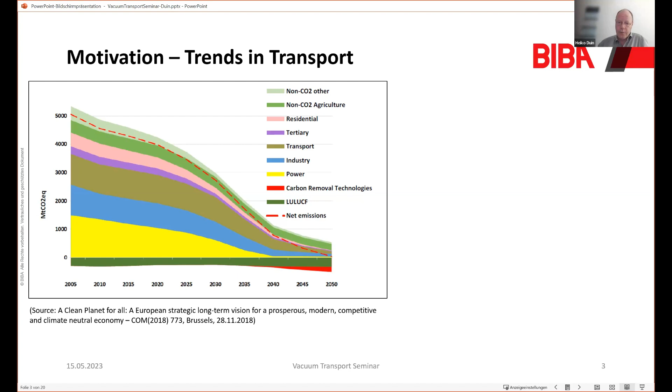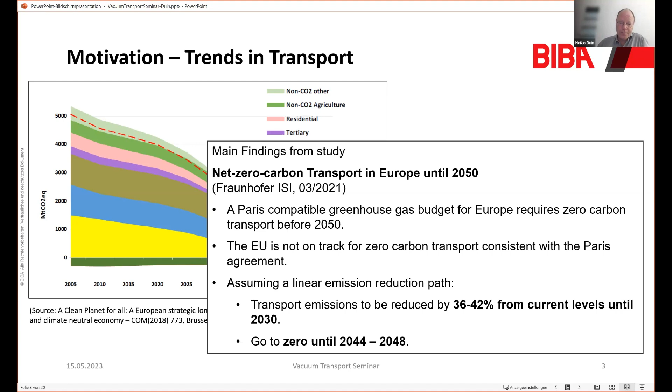But there was another study completed by Fraunhofer ISI called Net Zero Carbon Transport in Europe until 2050, and they concluded this is not enough. A Paris-compatible greenhouse gas budget for Europe requires zero carbon transport before 2050, and the EU is not on track for that. Assuming a linear emission reduction path, transport emissions have to be reduced by 36 to 42% from current levels until 2030, and from that point should go down to zero until 2044 to 2048, then we would be on track with the objectives set in the Paris Agreement. So the conclusion is that we have no time to lose, and the reduction of greenhouse gas output needs to begin immediately.

Within the project Epicenter, we are looking for answers to that. Epicenter stands for Enhanced Physical Internet Compatible Earth-Friendly Freight Transport Answer, and it's funded by the European Commission. There are three big areas: one is about new transport routes, like the Arctic and wildlife-friendly routes, or the new Silk Road. Then there are two more technology-driven topics: the first is Hyperloop, zero carbon transport saving up to 80% of energy, and the other is autonomous electric vehicles, zero carbon transport with electrified trucks. I'm focusing in the context of this project on the Hyperloop case.

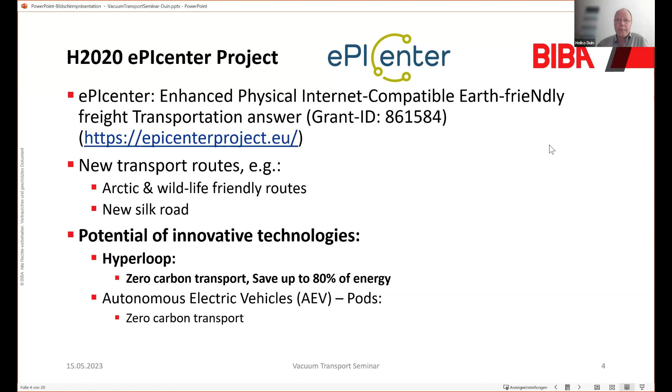So what is the nub of matter? What is the problem? The problem is that we are losing a lot of energy.

For instance, when trucks on interstates are running, they lose about 15 to 20% due to aerodynamics, and they lose about 58 to 59% through their engines, bringing the energy on the road.

When looking at high-speed trains, the problem is even worse. So when we have a train running at 400 kilometers per hour, the energy loss is about

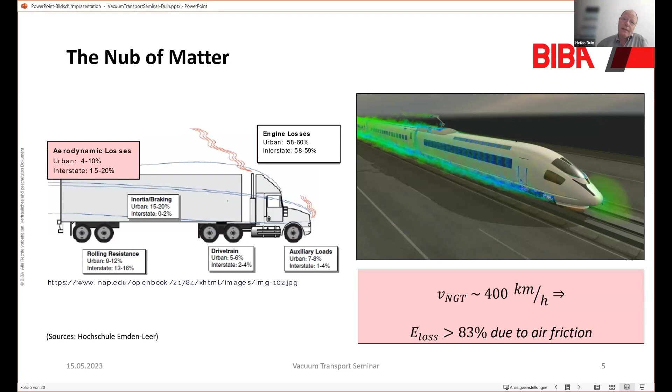83% due to air friction. So this brings up the idea of putting the trains, for instance, in an evacuated tube, which is then called Hyperloop technology. Within this evacuated tube, we are running pods.

They can be pressurized or not pressurized, depending on the cargo or what we want to transport with the pods. And we can also levitate the pods so that we have no roll friction, and we have a mechanically decoupled system. This leads to less wear, less vibrations, and we can run the system in an automated and controlled manner.

Within the mentioned Epicenter project, together with the University of Applied Sciences Emden-Leer, they're going to set up a demonstrator with a steel tube with a length of 24 meters and a diameter of 1.7 meters. They want to have it pressure tight down to 1% of atmospheric pressure, and it will be fully hooked up. This demonstrator we can then use to do some real technical experiments with this technology.

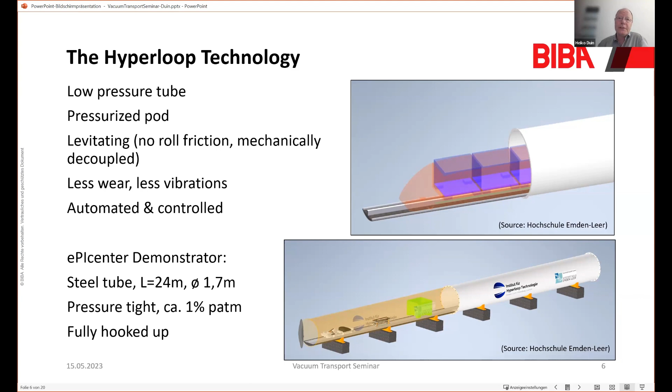Coming to my main topic, the planning methodology. We have an example in the Epicenter project where we want to connect a logistics service park, a logistics hub a little bit outside of a city, with an automotive production plant. I've researched the literature a bit about how planning works in infrastructure projects, and I came up with the German Federal Highway Act, which is a 5-phase planning design, starting with demand planning. Then we have preliminary planning, design planning, authorization planning, and finally the detailed design and construction.

In the demand planning, it's all about the demand we have. In our case, that means how much cargo needs to be transported from the logistics service park to the automotive production site. The preliminary planning is about where we can put the logistics service parks and how it can be connected with the production plant, so we have to think about possible routes.

In the design planning, we have to specify the routing more precisely, not only in 2 dimensions, but in 3 dimensions. So maybe there are things which need to be bridged or whatever. And we have to think about the capacity of the connection and whether it is economically viable.

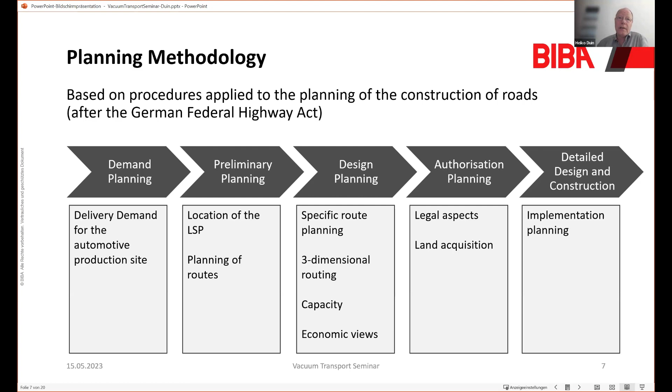On the next slide, I have this example we are looking at. We have this logistics service park, which is down here on the map, and we have an industrial plant, the automotive production plant, which is in the city of Wolfsburg. Now everybody knows about what plant I'm talking. And the distance is about 12 kilometers, or between 9 and 12 kilometers.

It depends on how we connect it with the CargoTube. The volume we have at the moment is between 10,000 and 12,000 cubic meters per day. And when we use this box, shown in the picture below, then we need around 12,000 boxes transported per day. The first assumption is that we can design a pod which can carry 6 to 10 boxes. So this is the example.

Now the areas of interest are: is it economically viable, and is the operation viable? What are the environmental impacts? What are the costs versus benefits? And what is the local acceptance of such a new transport technology?

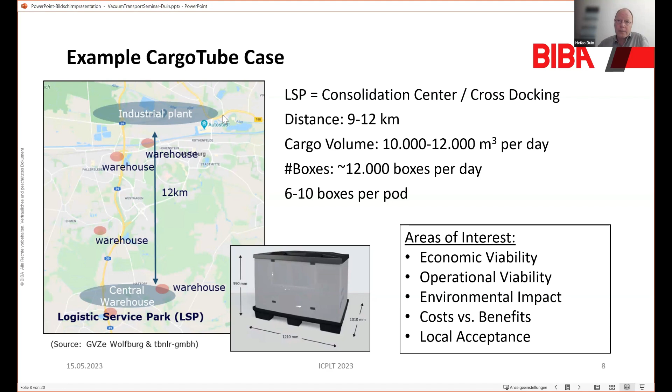Now I'm going from step to step in the 5 phases. The first one was demand planning. We saw already that we have to transport 11,000 cubic meters per day, and the distance is between 9 and 12 kilometers. But the cargo is not arriving evenly distributed.

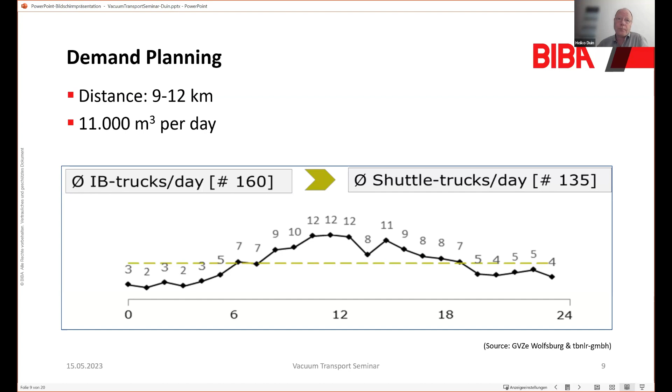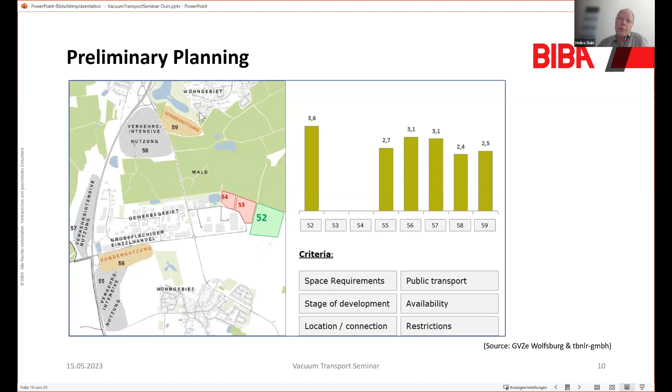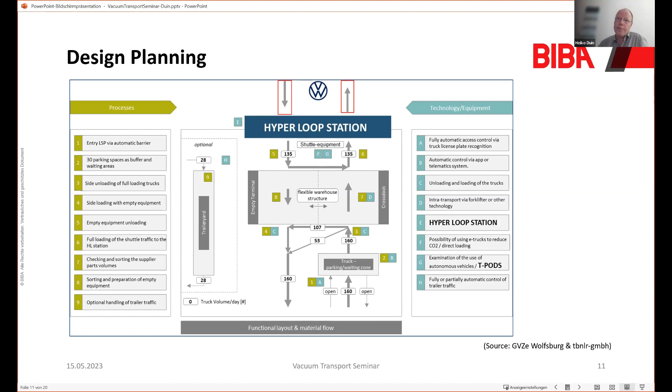We assume that the whole loading and unloading within this Hyperloop station is automated, so that we can use robots to do this stuff. Okay, this is the preliminary, the first stages of the planning.

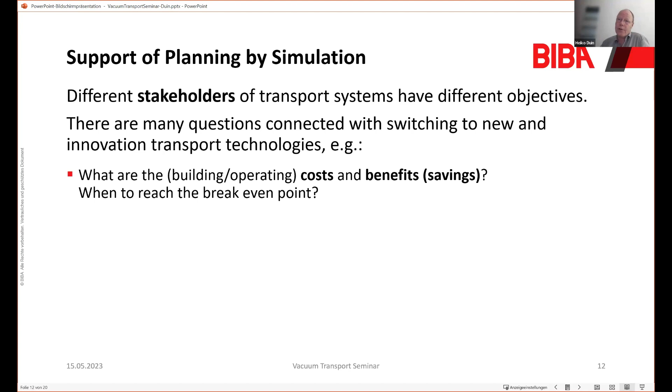But when we set up a new transport system, there are many stakeholders involved, and many questions connected with switching to new and innovative transport technologies. Examples are: what are the building costs, what are the operating costs, what are the benefits or savings we have, and when can we reach the break-even point when we make such a big investment?

What are the positive impacts concerning greenhouse gas emissions? Are there other positive impacts, for instance concerning particulate matter or noise? Is the logistics operation reliable in terms of timeliness and throughput? What are the socio-economic impacts, for instance employment or regional prosperity? And finally, what freight network configurations can be the best?

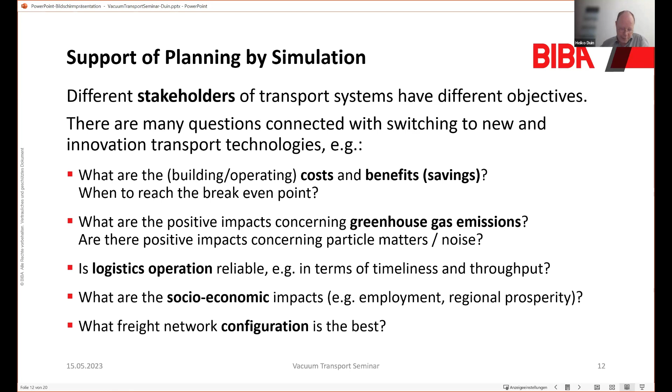So there is no one simulation tool which could answer all these questions at the same time. So, also within the Epicenter project, we made a framework to assess transportation technologies.

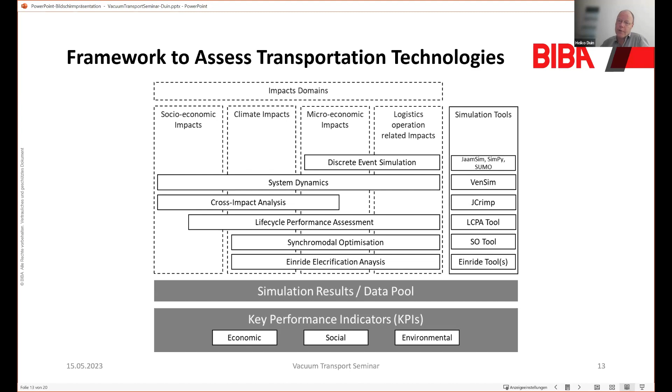From these simulation tools, we can generate data, simulation results, which we then can use to calculate key performance indicators, defined for the economic, social, or environmental domain. So this is our framework.

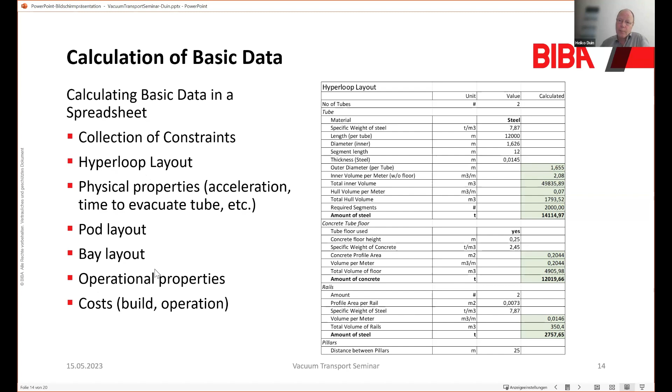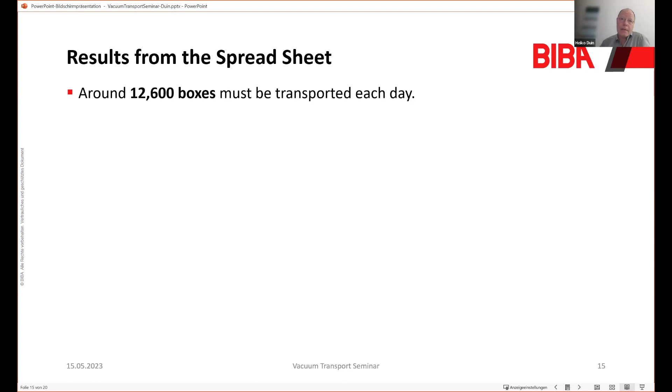So now when we have the basic data, first some results from the spreadsheet: around 12,600 boxes must be transported each day.

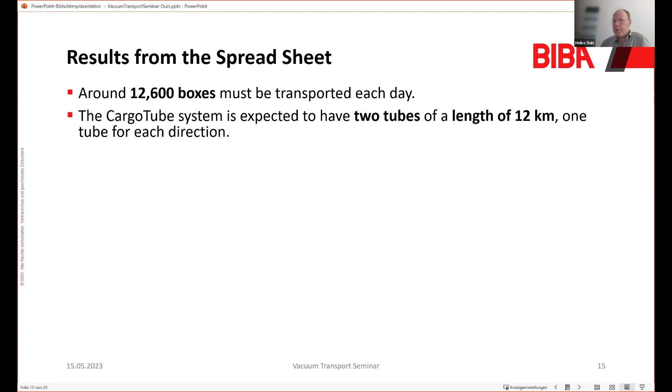We have a CargoTube system, which is expected to have 2 tubes of the length of 12 kilometers and 1 tube for each direction. Then the minimal inner diameter of the tube needs to be 1.65 meters. This is a constraint from the boxes we want to use.

And this results in 14,000 tons of steel for the tubes and 12,000 tons of concrete when the floor inside the tube is made of concrete, and further steel and concrete is needed for the pillars and for the rail systems.

Then the total volume within these two tubes is around 45,000 cubic meters. And when we have two pumps, the evacuation time down to 10 millibar is around 3 days, which seems to be quite long.

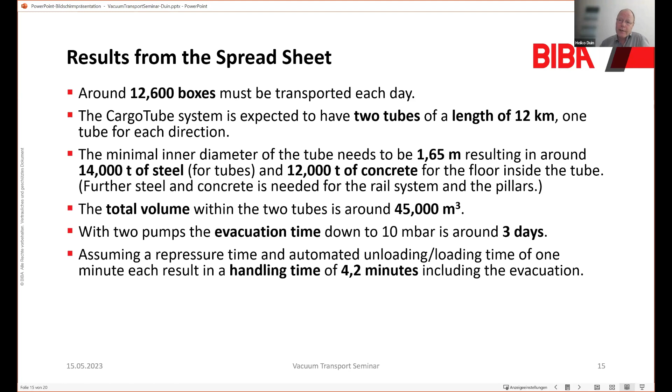Assuming a repressure time and automated unloading and loading time of 1 minute each results in a handling time of 4.2 minutes in a bay, including the evacuation. So when a pod is in a bay, the process is that it is repressured, then we have the unloading and the loading, and then we have the evacuation. And this takes 4.2 minutes.

The total travel time for a pod is 5.5 minutes, where we assume an acceleration of 0.1 g and a cruising speed of 150 kilometers per hour, and we also include the time for braking. In full operation, this system can handle 36 pods simultaneously.

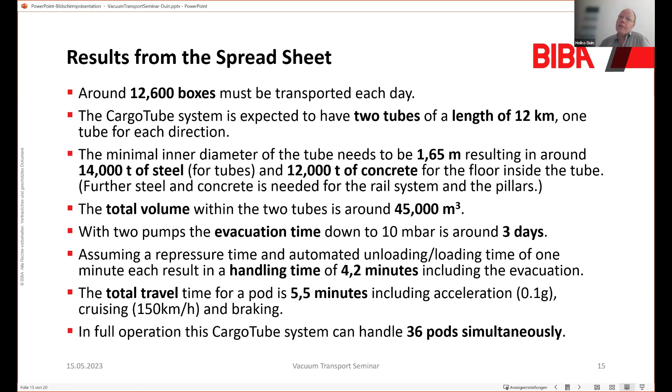On each side, we have 6 bays, and the process in each of these bays is what I said before: in the beginning, you have to wait with the pod until the bay is free. Then the repressuring takes place, the unloading and loading, and then the evacuation again. Then the pod has to wait until the tube is free, and we assume a safety distance of 1,000 meters, so when the last pod is already 1,000 meters in the tube, we can send the next one.

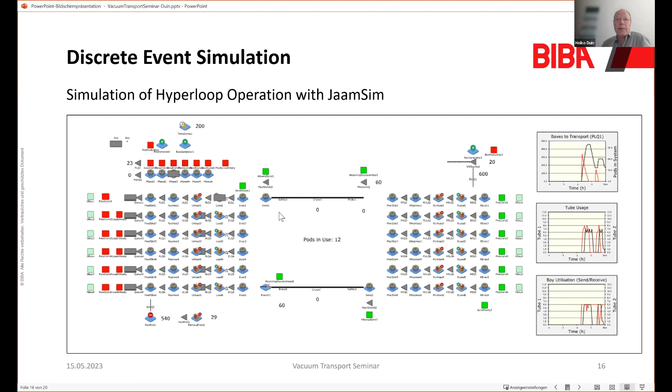We can run the system and do some experiments, for instance with specific demand curves during the day, or we can also experiment with the number of bays which are open. And I also have some results from the simulations.

The whole system is capable of transporting more than 16,000 boxes from the LSP to the production plants when all 6 bays are running, and there are no waiting times. That means the cargo is coming evenly distributed, and there are no gaps in providing cargo which is transported to the production site.

The maximum number of pods in the system when it's fully loaded is 33, and this is a difference compared to what we calculated with the spreadsheet. There we had the number of 36.

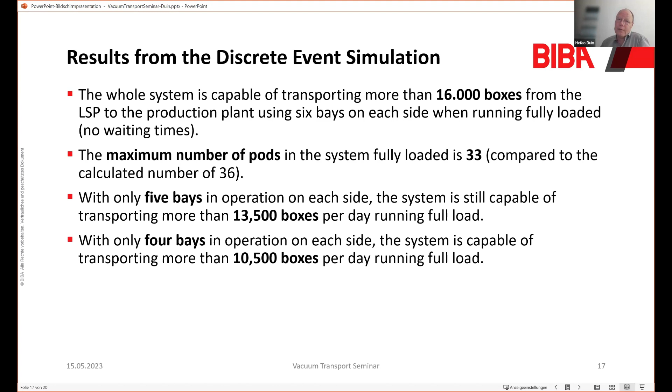Then with only 5 bays in operation on each side, the system is still capable of transporting more than 13,500 boxes. When we use 4 bays, then we can still transport 10,500 boxes. So 4 bays is the minimum, but then nothing should break, otherwise we have a problem. So it's better to have 5 or 6 bays and to switch them on and off when needed.

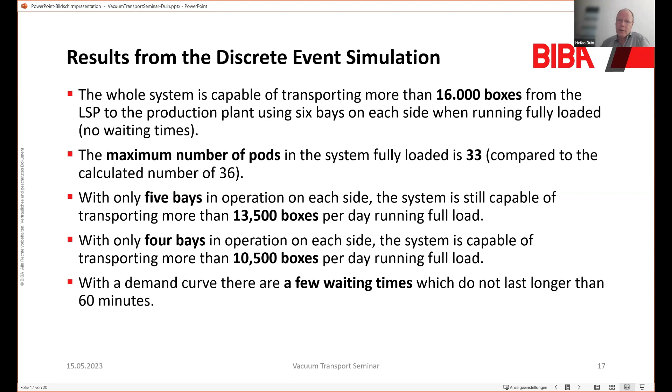So coming to discussion and conclusions, there are many advantages using a CargoTube system. The major advantage is the reduction of greenhouse gas emissions to zero. It depends, of course, on the electricity, how it is produced. Noise, weather exposure, and total energy consumption will be substantially reduced.

And we have reduced energy storage requirements due to electric propulsion and continuous recharging in the operation of the enclosed system. The CargoTube design is reliable and flexible, while automation reduces costs and personnel requirements. This is also important, at least for Germany, because we have a lack of truck drivers, and so this will help to overcome this situation. And we have a significant reduction in road traffic and congestions, especially in urban and densely populated areas.

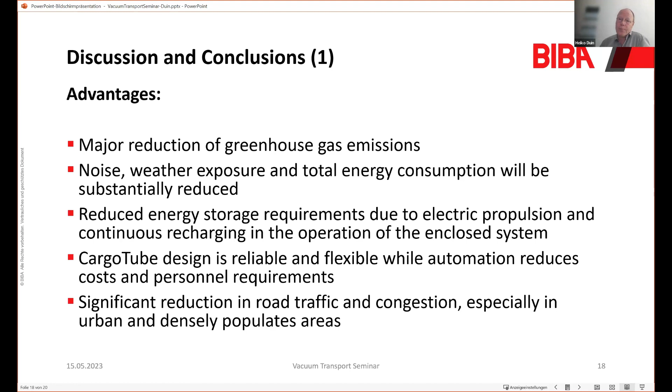But there are also some disadvantages. The first one I mentioned already is the time we need to evacuate the tubes. At the moment, there are 3 days, but we are thinking, or it needs to be proven, that the pod traffic can start earlier with reduced speed, for instance, while the tubes are not fully evacuated. That could reduce the time. We can also reduce the time by employing more pumps. So this is the point we are still in discussion.

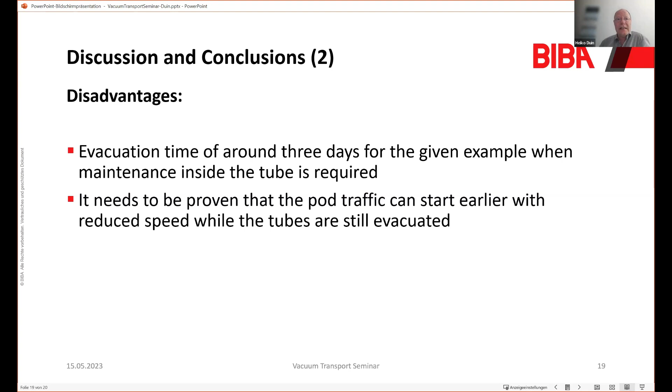And that's from my side. Thank you for your attention, and I'm open for questions.

Thank you very much, Heiko. Thank you for the great presentation. And I think Daniel is going to take the questions, right? Yes, so thank you, Lucas. Thank you, Heiko, for the nice talk. We would then take the chance to jump directly into the questions. There have been some of them, some quite interesting ones.

So the first one is more regarding the approach Heiko took to realize this model. What added value does this proposed cargo use case have compared to the ones we have been seeing currently from other Hyperloop players when designing such a cargo use case? I don't know the other ones, but for example, at a European level, we have seen some from Hardt, also from EuroTube at a certain point. Okay, so what is the characteristic, or what is different from these type of approaches compared to the one conducted from you?

I don't know, but I think what we are doing here—maybe Lucas, you can jump in—but what we are doing here is a very specific solution. We are transporting cargo from one point to the other, so we don't need such big tubes concerning the diameter of the tubes, and we can design it very specifically to the demand we have.

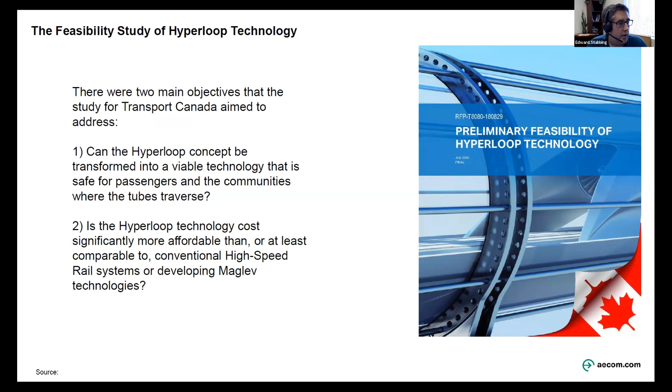I think the focus of my talk is going to be on a paper that was commissioned by Transport Canada for looking at the feasibility of the Hyperloop system. At the time, it was specifically looking at passengers, although it did recognize there was an opportunity for cargo as well. It sought to address two real questions: whether Hyperloop was ready to be deployed, and if it was, what the impacts would be. And secondly, to look at it directly in comparison to high-speed rail and maglev technologies, which were the two other options that certainly in North America - I'm based in Canada, just for reference - are being considered for high-speed ground-based transportation corridors presently.

So the study was structured in such a way that it had several key components. I'm not going to go into all of them because we'll be here for 5 hours, but it's a great report, so please feel free to read it. It is publicly available. I'm going to pick on the pieces that I think are probably more interesting to this group. So I'm skipping over the literature review, jumping straight into the technical features.

We did a technology readiness assessment, or a TRL approach, to looking at each of the components to the system. That was really important because it starts to highlight what's ready, what's maybe not, and then leads into the second piece, which I'm going to talk about - a risk and hazard assessment. The risk and hazard assessment is really key for Transport Canada as a regulatory body, because what they're sitting there doing is going, right, what are the risks? What do we need to legislate? What do we need to regulate? And what do we need to do to make sure that not only riders and users of the system are going to be safe and comfortable, but also the surrounding communities that this system is going to pass through.

So I'm going to talk through a number of different things that we did in terms of looking at risks and hazards. But firstly, I wanted to touch on some of the technology that we looked at.

We looked at a number of different areas: the infrastructure, so the tube and the structure, the propulsion and power delivery, whether onboard or infrastructure side, levitation and guidance, system topologies, and some configurations. We did a 500-kilometer test system and looked at some of the impacts that would happen as a result of going linear versus infrastructure side, and some of the other combinations we could look at.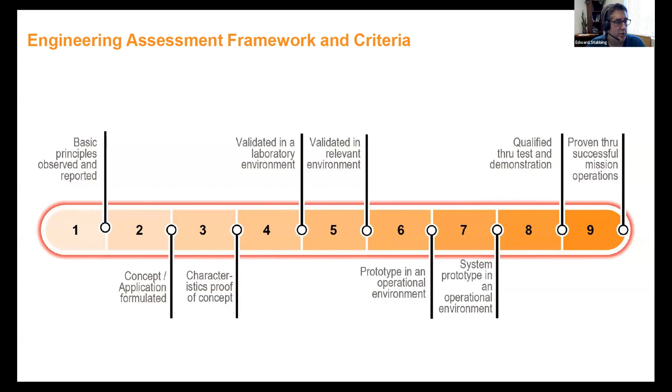We used the NASA TRL system, which for those of you who may have seen this before, gives nine levels of readiness—everything from 'that's a great idea and it's in somebody's head' to 'that's been implemented and it works and we trust it.' So we assessed these various technologies, looked at a number of different components, and came up with a lot of questions.

You'll see in the bottom right that some things aren't that far away from being ready, like the levitation and guidance system, the vacuum and the power. Then there's things like high-speed switching, which is still quite in its infancy and has a lot of uncertainty. As we were listening to Heiko's discussion, he talked about six bays—well, are those bays all going to be at low speeds like you'd currently see with high-speed rail and maglev, where you're talking 80, 90 kilometers an hour at most for those transfers? Or are these going to be in the hundreds of kilometers like the system is projected to travel at?

So it came up with these ratings, and from that we had a number of unknowns. I think that's fair for a technology at this level—to have these unknowns and leave a lot of questions that still need to be answered.

What is acceleration going to be? Some of our developers were saying we can accelerate at 3, 4, 5 Gs. Well, what's the impact of that on a human body? Is that even feasible? What will emergency procedures be? You just heard about what happens if pressure is lost in one of the sections of the tube—do you close off the section, or do you close the whole entire system?

How will boarding and alighting work? Some people say the pod's going to come out of the system, you board, and it's going to be reloaded and pressurized before being sent off. Others think it might be a loop, a bit like a train station—you come in, you board, and the loop continues on.

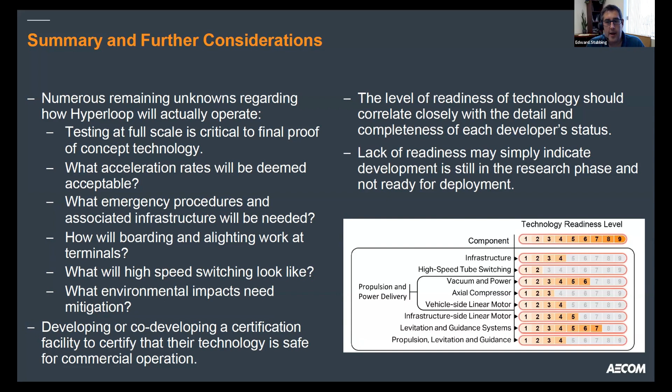So jumping into the next phase, we recognize where the technology is at, where we think it could go, what the application could be, talking about it as a passenger transportation mode. We start asking what are the hazards, what are the threats, what are the risks that come with this. We know some of the trip types, why it's been promoted as an important mode, why it's been given encouragement to be better than existing high-speed rail or potentially maglev.

What is the experience going to be like? Many of us have probably stepped inside a conceptual Hyperloop pod and seen this beautiful futuristic environment we get excited to ride in. But if we're going to be accelerating at 1, 2, 3 Gs, where's the safety in those seats? What are the rules about whether you can get up during travel to use the facilities? What if emergency braking suddenly has to happen at 1,000 kilometers an hour and you're not strapped into your seat? These questions start to arise when you think about the experience.

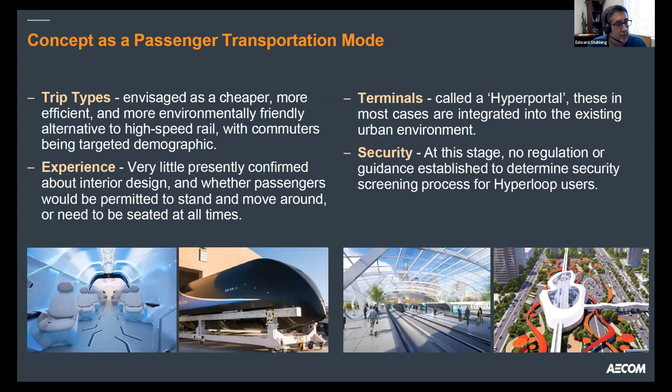One of the biggest unknowns is the terminals. Here's a picture of a potential terminal showing a single track where capsules load and unload. Is that realistic? What's security going to look like? We've all flown, so we know what security procedures are like on a flight. Is it going to be the same for Hyperloop, or like a modern railway station where there's very little security? You can walk right up to the vessel or carriage and board with minimal security, very last minute. That's certainly what a lot of the developers think. But if you talk to regulators, they're saying no, you're going to have screening, potentially identification verification. What does that mean for the amount of time and footprint of these terminals?

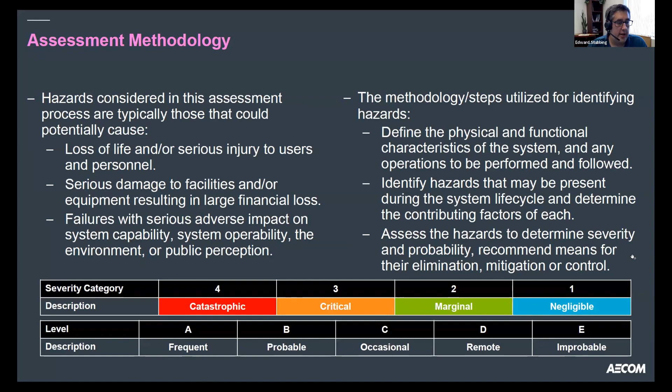Moving into our assessment approach, we utilized a two-part approach to assessing various hazards: the level of severity, i.e. what is the impact if it does happen, and the likelihood of it happening. That gave us a scoring process for all these different hazards and considerations. I will share this slide deck afterwards, since there's a lot of text to go through.

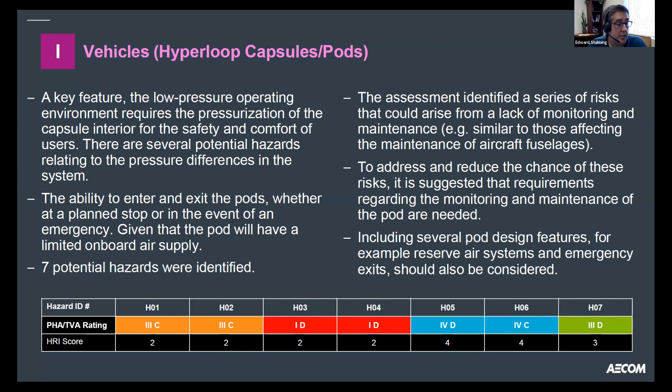So we looked at a number of different areas. We looked at the Hyperloop capsule, the pods. We identified factors like: what happens if there's a pressure imbalance? What happens if there's a technical failure of the life support system? What happens if the low-speed wheels do not deploy as the pod is approaching or departing from a terminal? We recognize there are risks here, also if the door of the pod doesn't open or close. What happens then? We categorized these risks and realized there are risks that, if they happen, are critical, and the probability of them happening is medium. That's the sort of thing that starts making regulators think this is something we might need to regulate, something we might need legislation to manage and protect.

Skipping through to power, we had questions like: what happens if there's a temporary power spike and the guidance or levitation is impacted? What happens if the magnetic gap between the primary and secondary motor fluctuates during operation? What's the impact of this? What happens if the entire propulsion system cuts out? That leads into: what happens if the power goes out? What are the evacuation procedures? What are the backup systems?

How are we legislating for backup systems into these pods? We start to realize, okay, we've got a pod that's been developed. It's going to take 16 people, have an onboard battery, and weigh this much, and this is therefore its capability of accelerating. Then you start bringing in regulations. Now you need a reserve power system, now you need a backup oxygen system. Suddenly the weight of your pod increases, the size of your pod increases, or you have less people sitting in the pod. What does that do to the economics of each pod? So you start realizing how regulation and legislation can have a huge impact on this system.

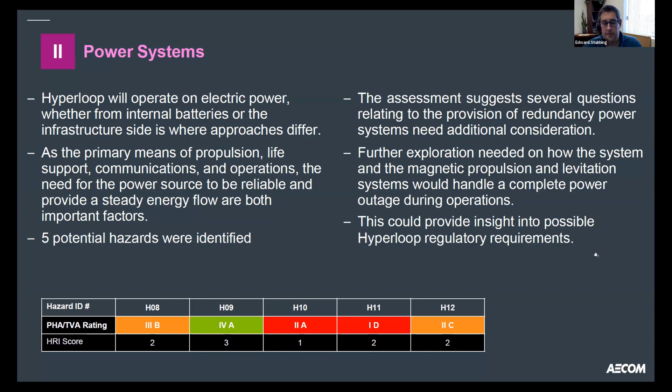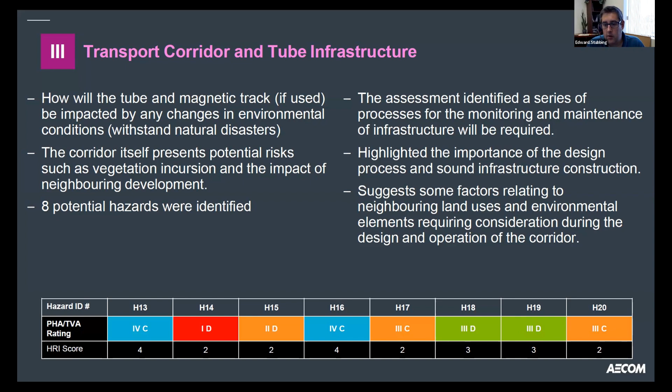Looking at the corridor and the tube infrastructure, what happens if you have an above ground system and the pillars fail? What happens if trees fall on the tube? What is the process for monitoring and maintenance? What happens if the high-speed switches fail? These sorts of questions start to appear, and you realize this is going to have operational impacts. I'm flying through these because there's a lot and it's a bit repetitive, and I really want to get to the questions because I think that's where the excitement is.

Communications - this is one of the areas where, from a technology readiness level point of view, it's quite well advanced. There are a couple of queries though about the capability of existing communication, even 5G communication, being able to match the times and requirements of a system traveling over 1,000 kilometers an hour. And so this is where you start to see some real risks - probability of them happening fairly low, but the risk if they do happen is quite high. What happens if you're talking about headways, and the communication system between each pod fails?

We heard Heiko talking about 1,000 meters. Some of these developers have said they think the headways could be a matter of seconds between these pods. What happens if pods traveling at 1,000 kilometers an hour, seconds apart, need to communicate constantly? What happens if that communication fails? So you start realizing, okay, now a regulator might start saying, well, actually headway has to be 4 times the braking distance of each pod, and you need to have some redundancy system. That means if one pod fails, every pod immediately brakes. There's a lot of complexity that goes into implementing those additional systems.

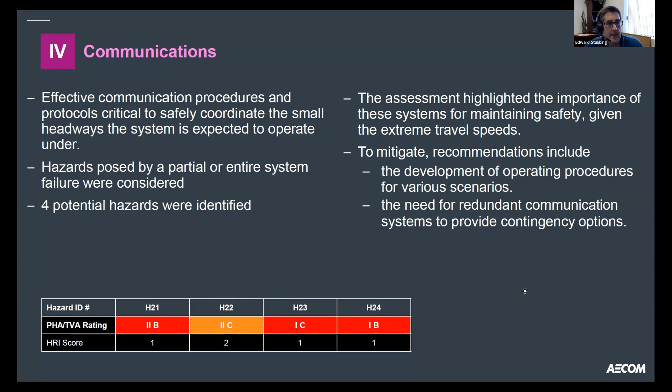Terminals - I touched on the security and safety side of things. We did talk a little bit about the exit and entry. What is the footprint going to look like? What is the mechanics and security around this going to be? One of the big concerns from any regulation body when you start talking about pressurization or high speed is the risk of terrorism and threat. And that comes with that. That's something I'll pick up on in one of the subsequent slides.

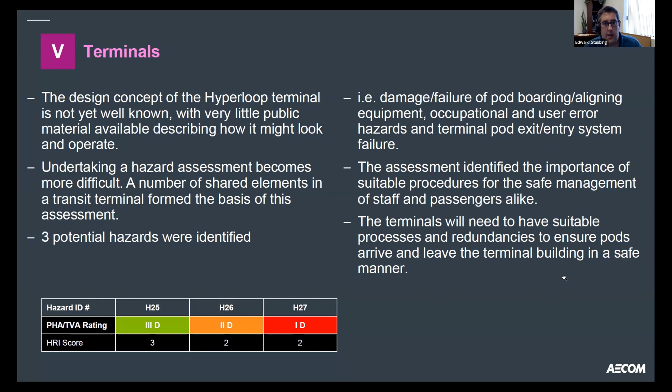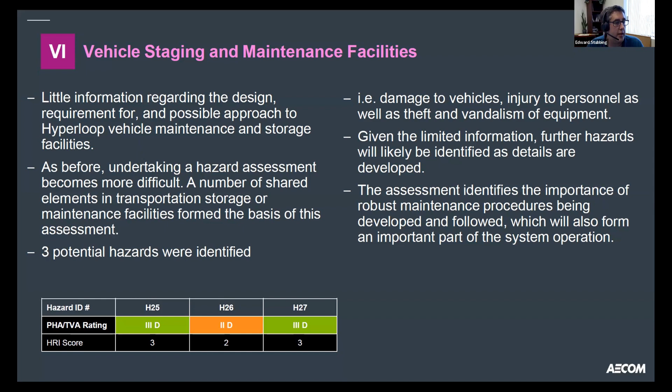From a maintenance point of view, look at what happens if vehicles are damaged during storage and maintenance. What's the procedure in terms of inspection? Think about the airline industry right now - before a plane takes off, an inspection has to be done by the captain. What does that do to the delay in terms of the turnaround time for that pod? If you're saying now every pod has to be visually inspected or has to go through some sort of diagnostic system in between each trip, suddenly your turnaround time isn't minutes. It could be 30 minutes, 40 minutes, 45 minutes, depending on what the regulator requires in terms of inspections to be done before the trip.

And then operations and maintenance - what happens if pods stall in the system? What happens if they stall at the station? What are your procedures? What do you have in place in terms of removing pods from the system? What do you have in terms of something external colliding with part of the infrastructure corridor? You might have tubes that go over a highway - what happens if a truck veers off that highway and hits the pillar that supports those tubes? What are your procedures for inspecting and resuming operations along that corridor?

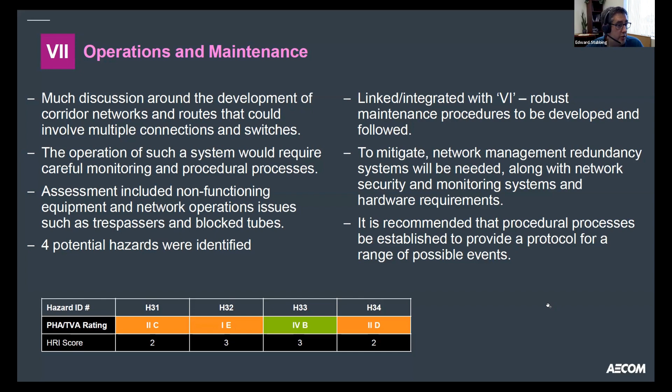I mentioned we also looked at a threat and vulnerability assessment. So this is where you start looking at what are some of the emergency conditions that could happen. And this is where you're really looking to examine security, vulnerabilities, and what the causes are.

One example that comes up a lot is what happens if a passenger has a medical emergency while on a pod. What are the procedures for stopping the pod? Is there a member of staff who can activate an alarm and cause a stop? Does it rely on other passengers alerting someone remotely? What happens if oxygen leaks and everybody passes out? What's the procedure for that?

So we start to see there are a number of other threats and vulnerabilities where traditionally, as we've seen in the airline industry and the rail industry, regulation and governance have to step in.

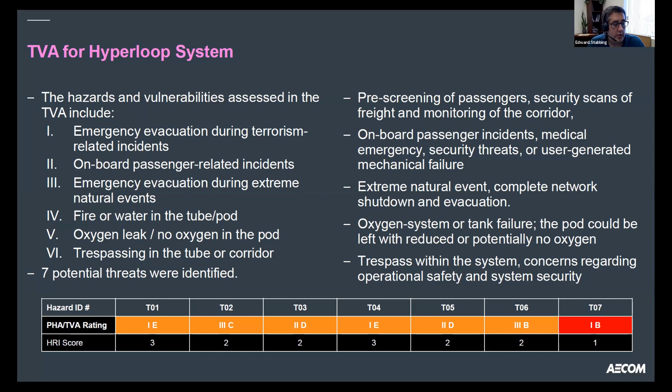So what we realized, and I'll make this the last slide since we're against the time, is that there are 6 different areas of policy that we think, in this case Transport Canada, but really any governing agency, needs to look at: vehicle design, regulating infrastructure, regulating system components, regulating communication, determining how to regulate environmental factors, and what regulations are needed for security.

On this slide, below each of those 6 areas, we've tried to identify some of the items we've flagged and where they might sit in terms of regulation. You start to see that something like energy is probably going to be regulated by a number of different sectors. Why does this matter?

Because these 6 policy areas probably sit with different teams in a regulatory body. So we wanted to highlight to Transport Canada that this is going to be an interdepartmental effort to develop standards—this isn't just sitting with one team as it currently does.

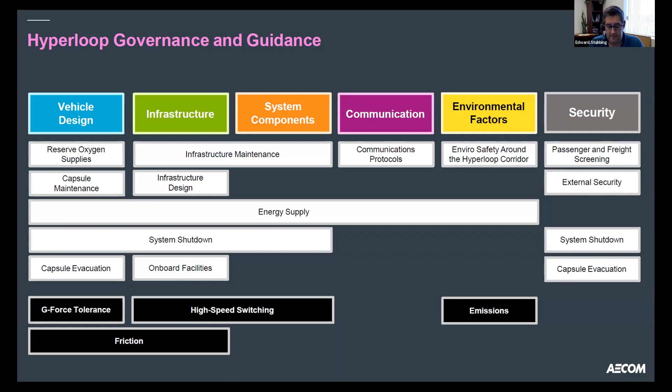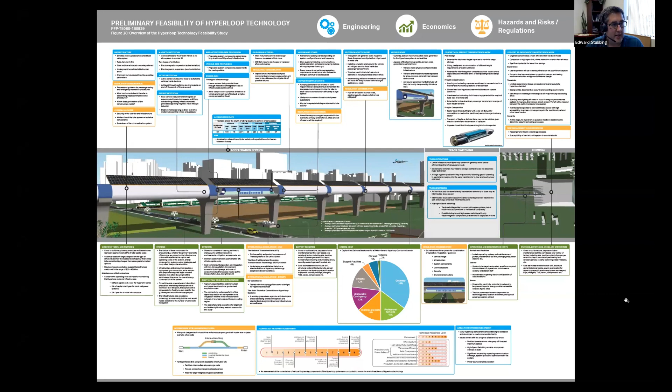And so we created this issues map, which will be shared. It's in good resolution so you can zoom in. I think it's a really cool summary of everything we've talked about.

As for key findings, we've realized there are a lot of factors that need regulation and legislation, things that are going to impede the commercial viability of this system, its development and operation. These are things that really need to be worked on by regulators right now, to help developers prepare for them rather than letting developers build a beautiful system and then throwing these regulations on them afterward.